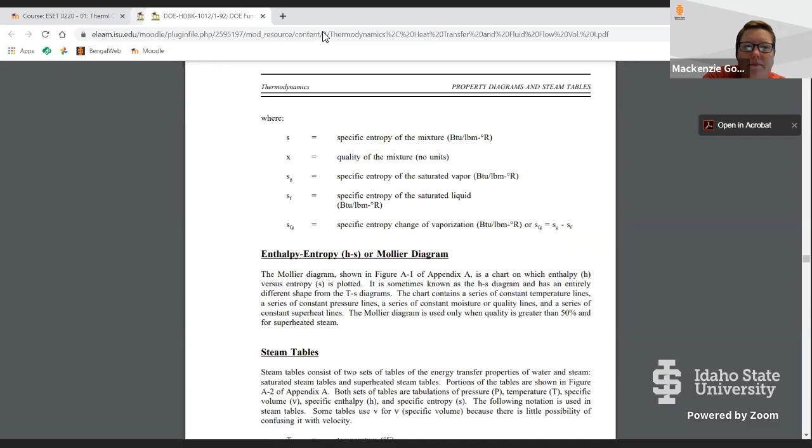So if you go to week 4 under Thursday, there's a couple of different steam tables. Let me share. You guys can see, so we've got English and SI units here, and then we've got some for saturated steam. Let's open them up. So English units, SI units, saturated steam.

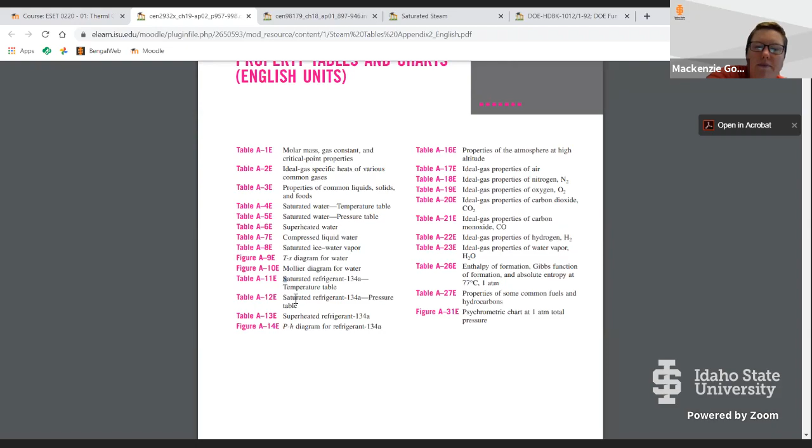So if you go in here, this English unit, it has this list of tables in the appendix, right? And so depending on if you're dealing with saturated liquid or superheated steam, these tables A11 and 12 are going to be steam tables. And if you go through here, right, so here's for our saturated refrigerant, at a specific temperature and pressure. And then it's going to tell us the specific volume, internal energy, enthalpy, right? So this is essentially an example of a steam table.

They can be laid out slightly different ways if you're looking at your textbook, right? It has a pressure, right? So on page 241, it says atmospheric pressure. And then it has saturation temperature, 100 or 212 or 250. And then it has a list of different quality percents for the steam. And then from there, you can determine the specific volume, density, enthalpy, entropy, etc., for the pressure and temperature and quality of water that you're looking at.

So they're each kind of laid out just a little bit different based on the information you're actually trying to find.

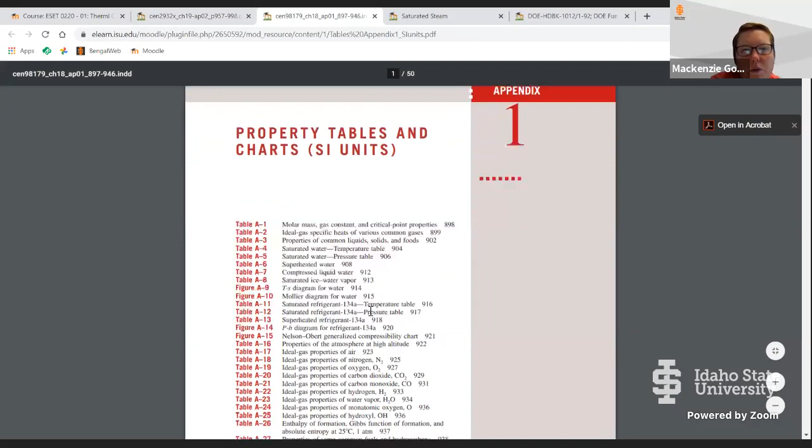So here we have for our other units, our SI units, and the saturated tables, table A, 11, 12, and 13.

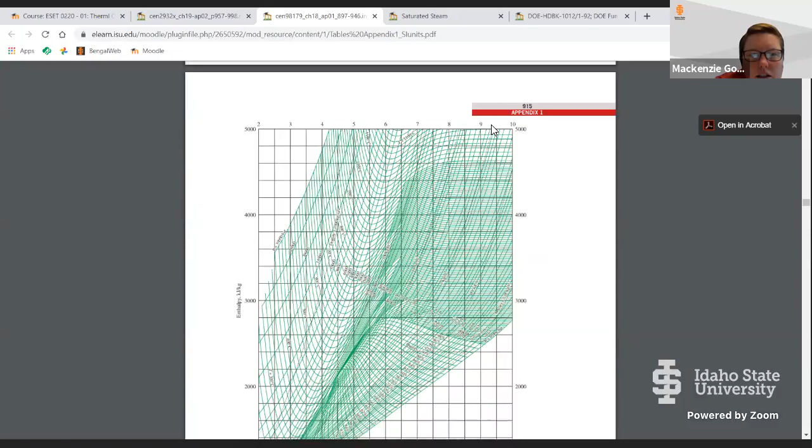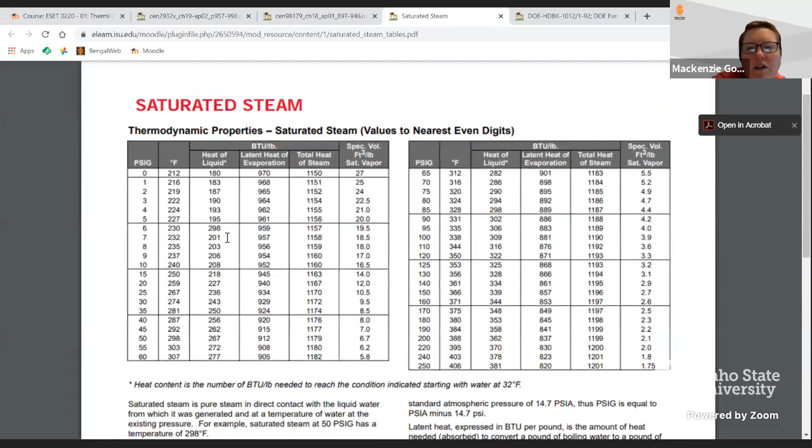But we can scroll down here. And for a given temperature and pressure, here's our specific volume, internal energy, enthalpy, entropy. And then here, this is a little bit simpler table. This is telling us it's for saturated steam, and we have that saturated steam at a specific pressure and temperature. Because we know we're dealing with saturated steam, that pressure and temperature are going to be given as they relate. That's how we get our saturated steam. And then we can get our heat of the liquid, latent heat of evaporation, total heat of the steam, specific volume. So this table is just giving us a slightly different layout.

But what's really important about steam tables is they allow us to make an important distinction between the properties of steam in different thermophysical states. So as we look at our subcooled or wet steam, or our dry steam, or superheated steam, whatever it is that we're looking at, you can look at the different table and determine all of these different parameters.

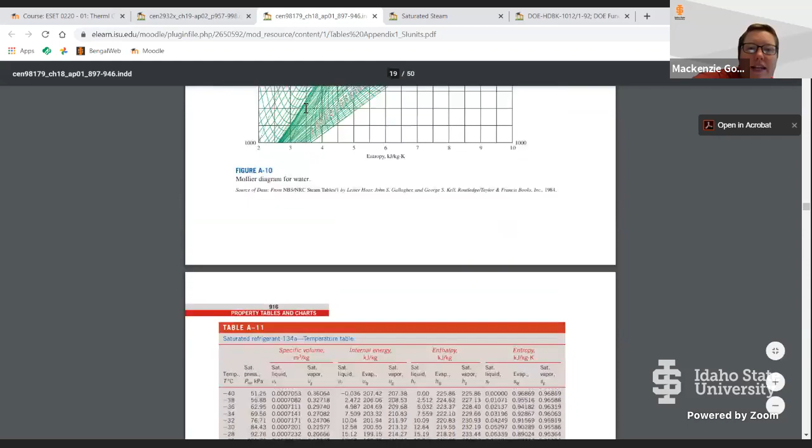You can also look at a graphical representation of this. For example, in the textbook on page 245, there's a PH diagram for water and a TS diagram for steam. And in these PDFs that I have on Moodle, you can go right here. Figure A9 is a TS diagram for water.

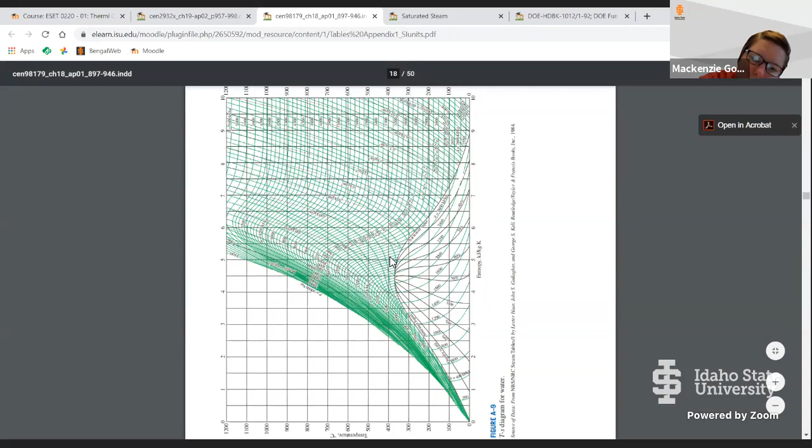So we can look at the same thing online. Here's a TS diagram for water, which looks just like figure 7.19 from the textbook. You can trace your temperature and your different pressure lines, and you can find where that interacts with different specific entropy, and you can do it graphically. So I've got temperature here, entropy here, and different pressures on these lines. I can trace that, but we put it in table format where it's much easier, in my opinion.

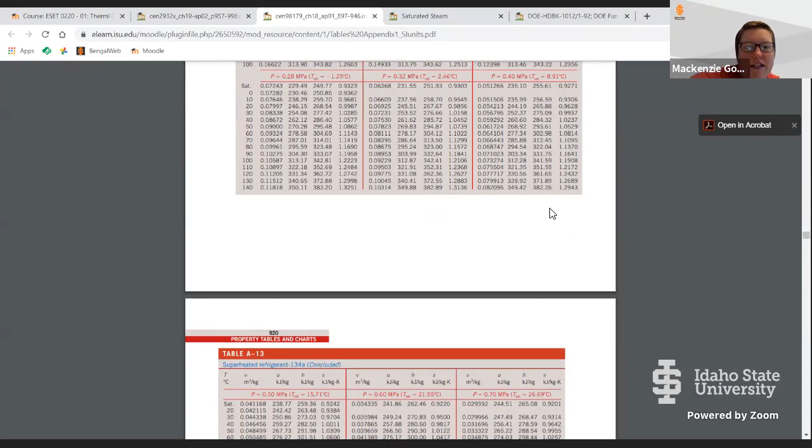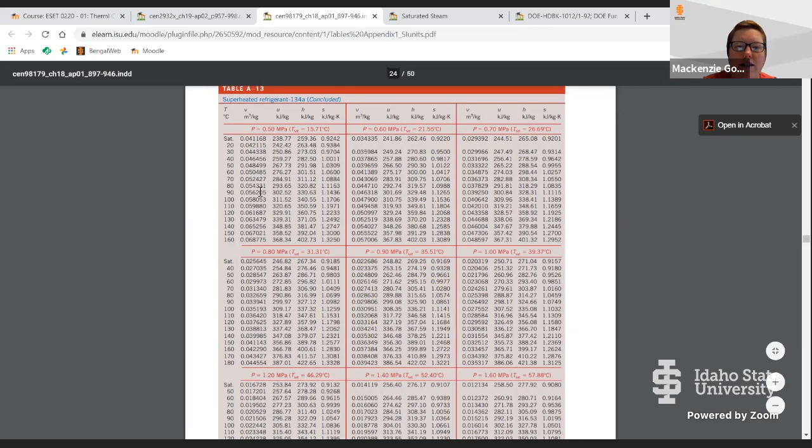Table 7.3 in the textbook, and then the tables A11, 12, and 13 on these online PDFs, give us that information in a much easier to digest format. I would much rather look at this chart for a specific pressure and temperature, look at my temperature, volume, enthalpy, entropy, internal energy, etc., than trying to trace it on a figure that looks like this. This is a much more complicated and error-prone scenario.

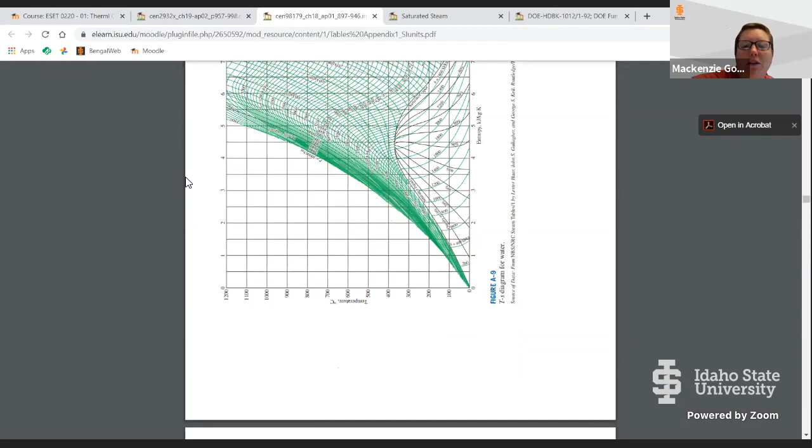So I want you to have seen the steam diagrams. I want you to understand that by charting this information experimentally, we were able to put the tables together, but I'm only going to ask you to read information from the tables. I'm not going to ask you to look at Mollier diagrams or TS diagrams for water and pull out entropy and stuff. So just so you know the expectation in class.

But we are going to do a quick exercise, working through an example in the textbook for using the steam tables. They're a very valuable resource. The example problem talks about their use for nuclear engineers, but they're also extremely important for operators who are going to be interacting with systems that have steam, water, or a steam-water mixture.

Their example is a PWR at a pressure of 2,250 PSI or 15.5 megapascals. This example is on page 244 of the textbook. Liquid water enters the core at 295 degrees Celsius and leaves at 335. What's the difference in the specific enthalpy of the water entering and leaving the core? So essentially what it's asking us to look up is specific enthalpy, H, for water at 15.5 megapascals and 295 degrees Celsius.

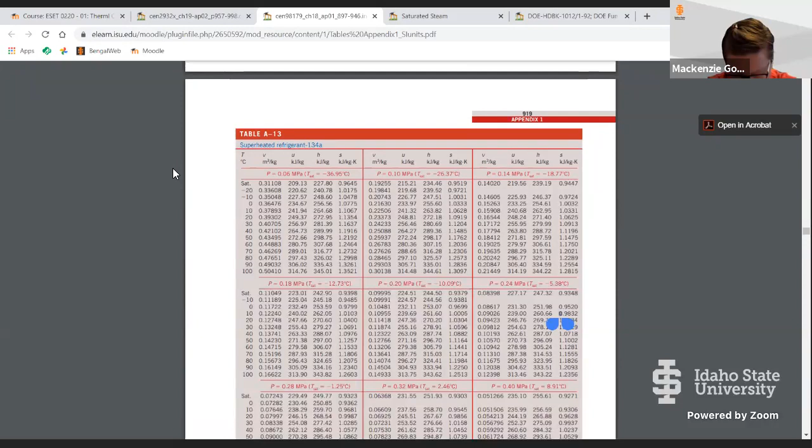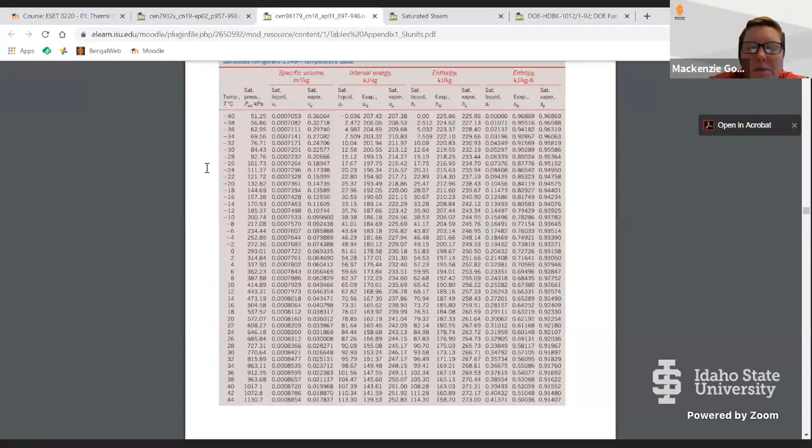So we need our table for steam. Water enters... and I'm not sure if these online ones will have the exact pressure and temperature we need to look at. It doesn't look like they go high enough. So those of you with the textbook, 15.5 megapascals.

On which page of the table? 243, that's correct, middle. And our temperature that we're dealing with is 295, right? Yeah. Makes sense. Over here is your 295 Celsius water, but that's at a different pressure. So we want to find our specific enthalpy of the water entering the core, right? Yes.

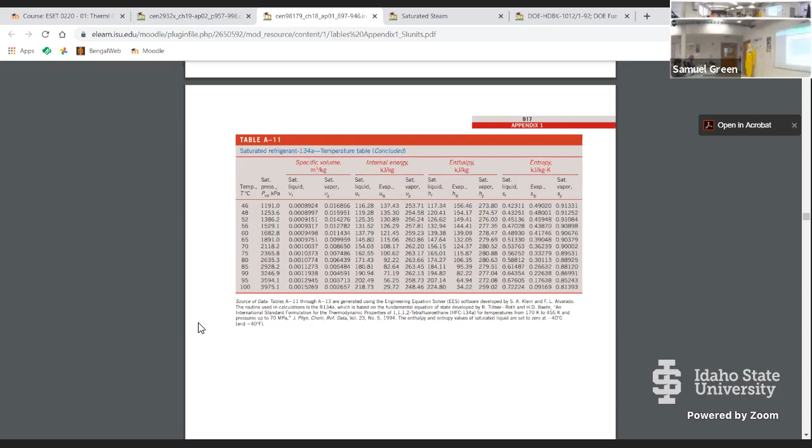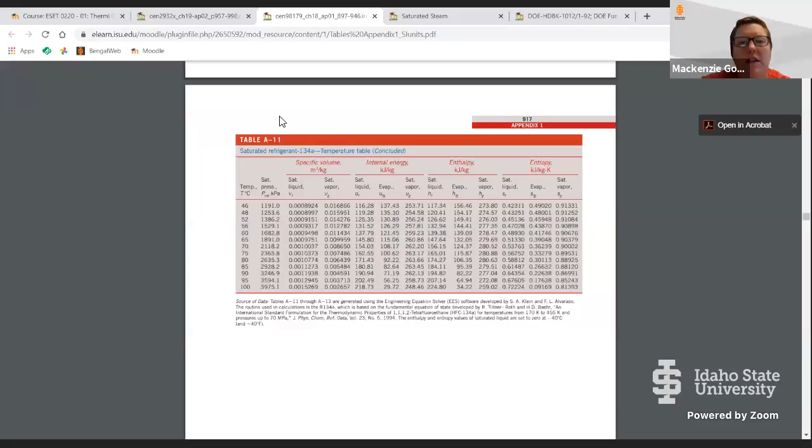So how do the percentages come into play, or like the quality? So from the DOE handbook, there is an equation for quality. I think there's one in the textbook as well. Essentially what it's saying is what percent of the mixture is water and what percent of the mixture is vapor. So quality, if you look on page 235 of the textbook, it gives you essentially that quality is the ratio of vapor to the total mixture. Half the mass of the mixture is liquid and half of it is vapor, then our quality is 0.5, or it would be 50%.

So at essentially 5%, you're almost all liquid, and at 90%, you're almost all vapor.

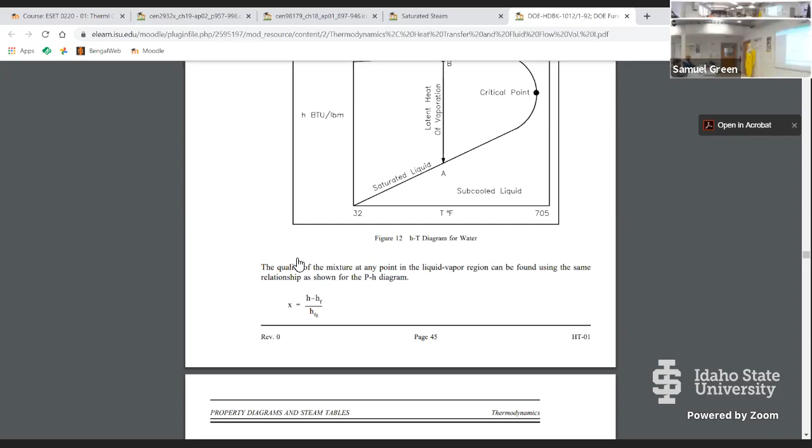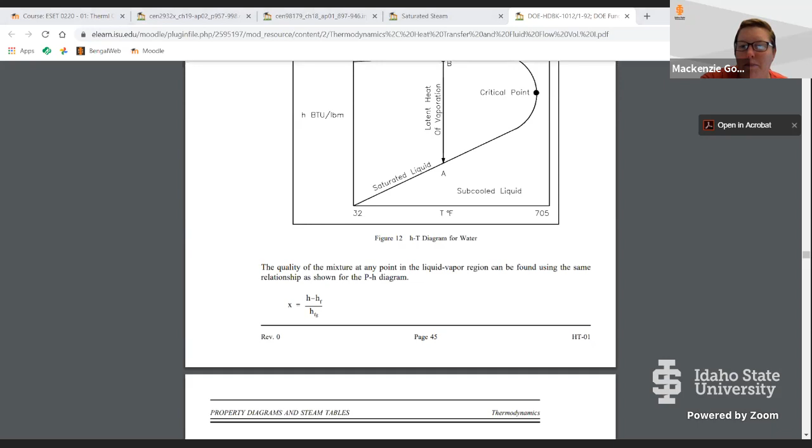Does that make sense? Small part of it makes sense. The part about the water quality makes sense. The question, yeah.

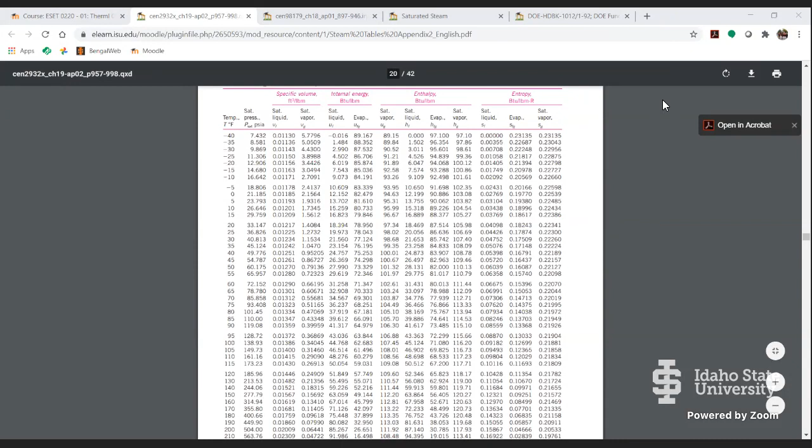I couldn't tell who said they have a question, but go ahead. This is James speaking. Are we looking for our saturation temperature? Because that's 8 MPa versus our 15.5 MPa, which has a different saturation temperature.

Right, so essentially, because we know the water is water when it enters the core, right? And then it's going to be increasing in temperature at that specific pressure, right? So we're going to look here at the saturation temperature of 100...

I see what you're asking. It gives us this 15.5 megapascals, and we look at that on page 243. It says the saturation temperature is 344. So how do we find out what our enthalpy is for the water coming into the core? Because that's at 295, right? Is that what you're asking? Yeah, that's correct.

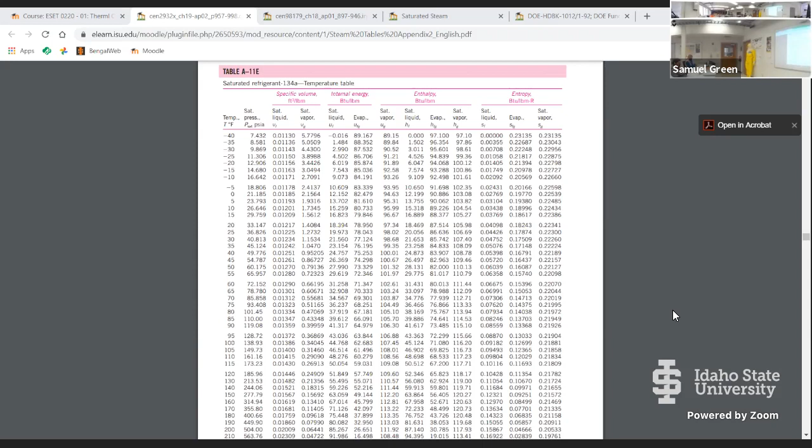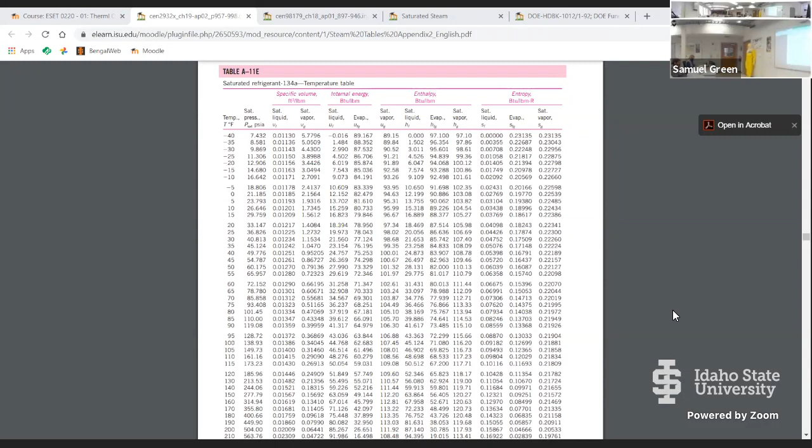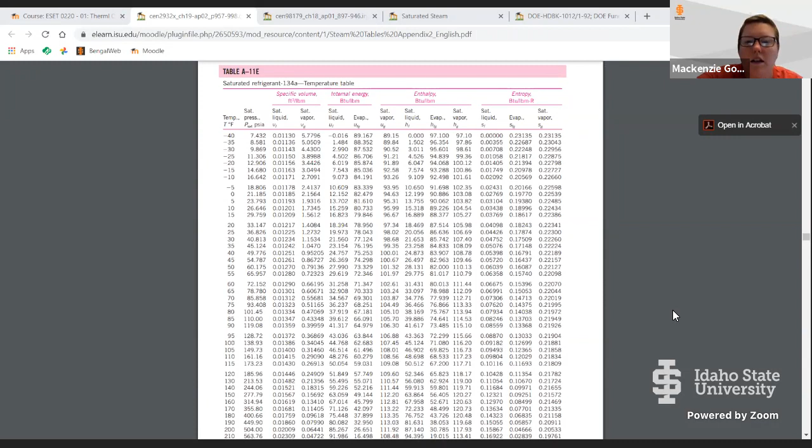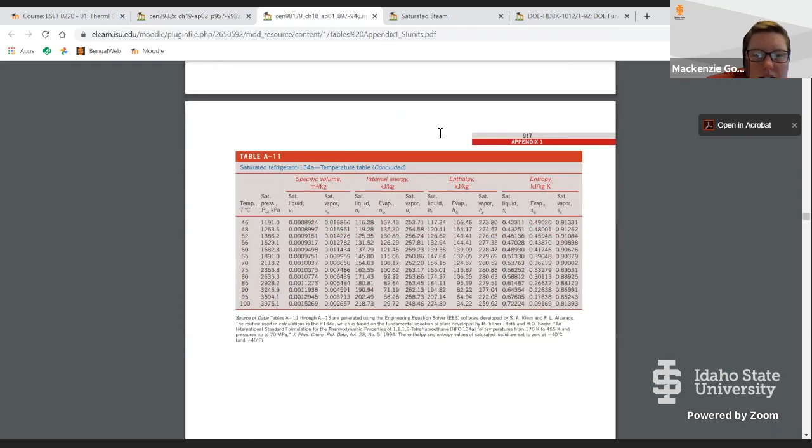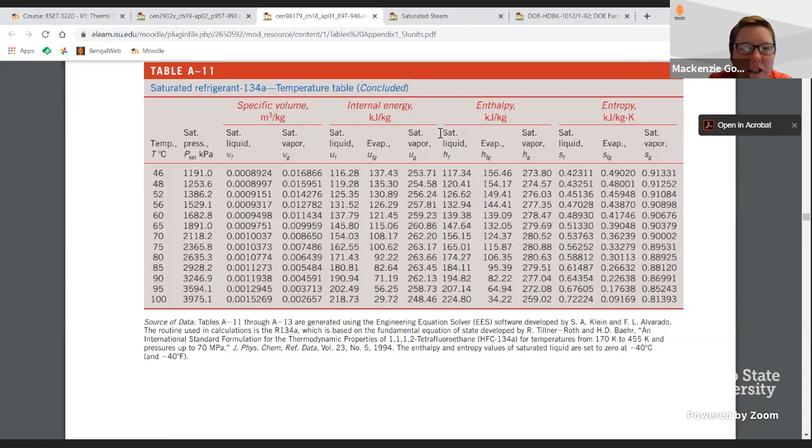And 12, 14. So let's look. It looks like I'm trying to bring this up to show you guys on the computer, because I know if I hold the book up, it won't show very well.

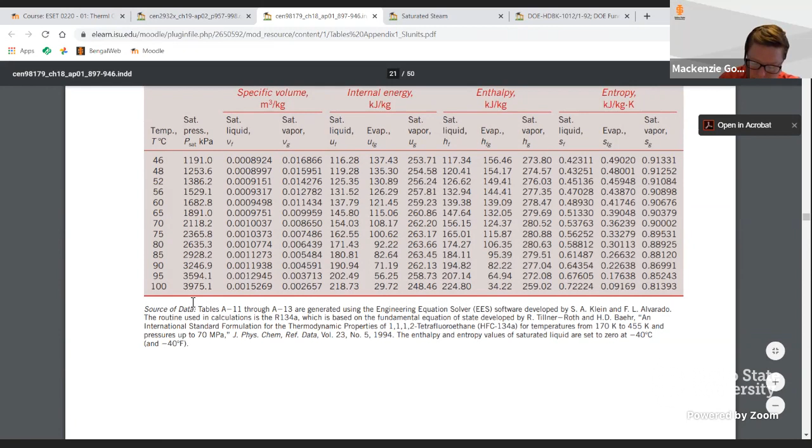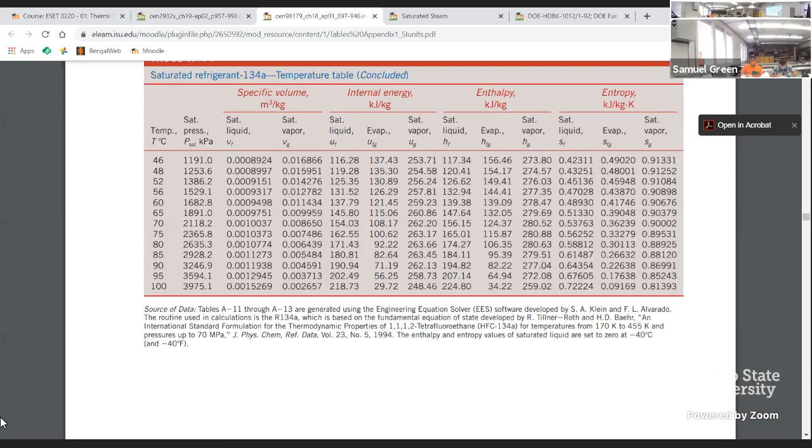So would it be fair to say that we should have been looking in the appendixes the whole time to solve that quiz problem? Yes. That quiz question, I believe that when I wrote it, I said specifically using the steam tables from the text. Yes, you did.

And so then when you read example problem 7.5, it tells you, hey, we're looking at steam tables - steam tables are one of the most important resources. And we have this pressure and temperature liquid water, and then this pressure and temperature liquid water. Find the difference in specific enthalpy. You should say, okay, I have liquid water at a temperature above which it normally boils, being held at a pressure. So then I know I need to be looking at liquid water.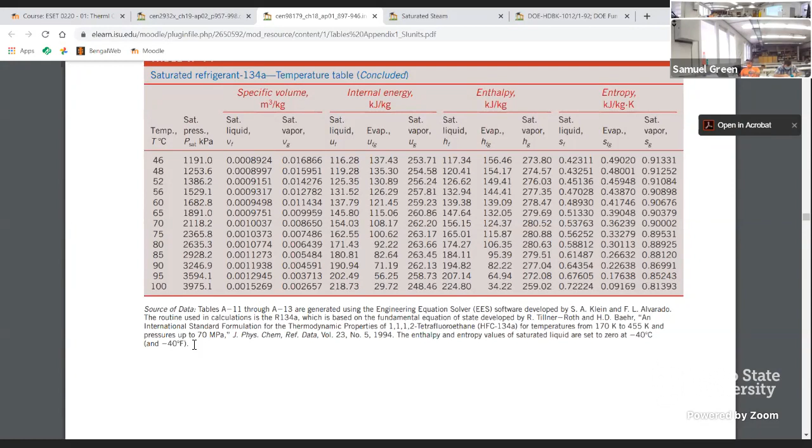So the quiz questions should be from information that's actually available in our small selections in the textbook. Does that make sense? So you're saying that the quiz question should not have required us to go to the appendix? Oh, no, it should. I'm saying that the appendix does not hold a complete and whole steam table, it is a portion of a steam table.

So it's possible that at some point you might have a system where, if you go back to this textbook, that pressure and temperature aren't in the book. I'm not going to ask you a quiz or test question that doesn't use resources you'll have available to you. So what I'm saying is you don't have to find a different steam table. If you have the textbook, the sections that are reprinted here for you to use are what I'm going to use for questions.

Does that make sense? Can we use the book on the test next week? If you need a steam table, I'll make sure it's printed out with the test. So no, you can't use the book. A one-sided crib sheet, right? Yes, you can have a one-sided sheet.

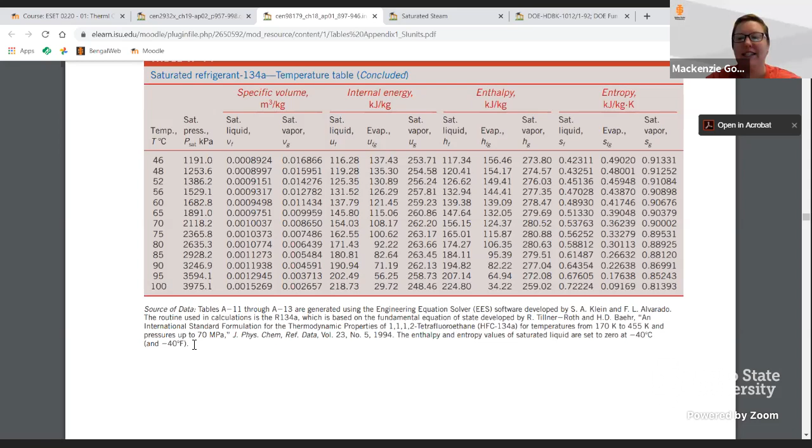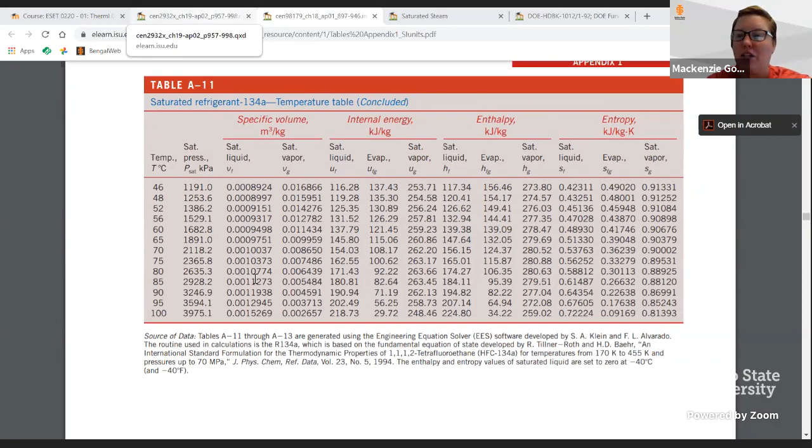Before we move into talking about the test, which is the next topic, does anyone have a question on that example, or how to get to the steam tables in the book and what kind of information you're looking for in a question that tells you which steam table to use? Yeah, I got a quick one. What cued you to assume that the water was subcooled?

So when we look at the temperatures in that example 7.5, it's in Celsius, right? What temperature does water normally boil at in Celsius? 100, right. And what temperature is our water, liquid water, coming into the core at? What did he say it boils at? It's coming in at 295, right? So significantly higher temperature than it would normally already be steam.

Subcooled water is water that is still liquid water at a temperature that it should be steam, right? So because we see that it's liquid water, we know that it's being kept a liquid by that pressure. So we know from the definition of saturated steam and saturation and subcooled liquid and saturated water, that this is still going to be a subcooled water because of the temperature that it's still a liquid at.

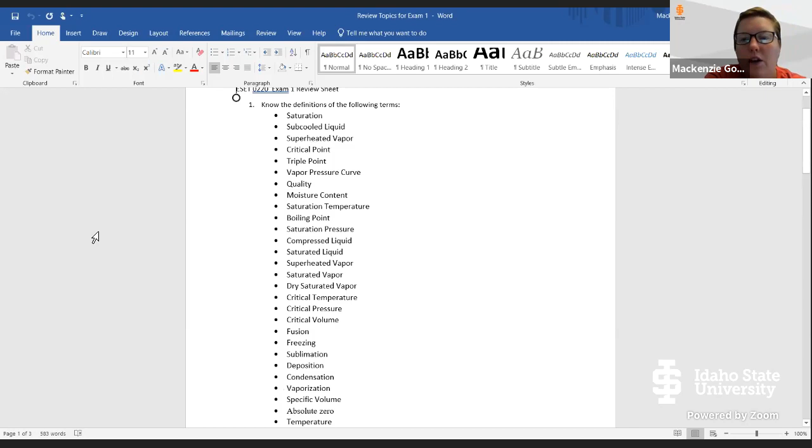Okay, so first we have a list of definitions, right? It's a pretty long list, but a lot of them are pretty easy definitions. So I would definitely be familiar with what these different definitions are, okay? And they are all in the DOE handbook, or both the DOE handbook and the textbook reading.

The textbook does have a handy little index at the back. So if you're looking for the definition of, like, critical point, you can open up the index and it tells you that point is on page 983. And then you can flip there and it talks about critical point and your liquid vapor mixture. And there's also critical point shown in the presentations and it's in the DOE handbook.

So all of these we've gone over. You've either read them or we discussed them specifically in class. Okay, we talked about the Carnot cycle, right? So a question might be: if I give you the temperature of the heat sink and the heat source and the amount of work that's done, can you determine the amount of heat that went into the system, right?

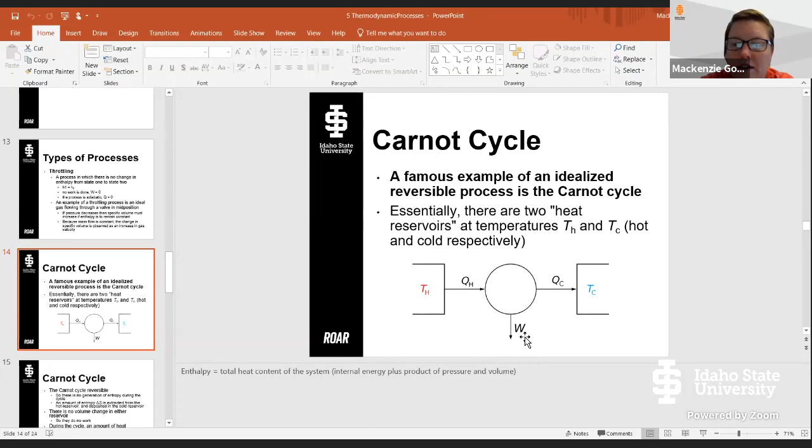So from this PowerPoint, right, let's look at the Carnot cycle. So if I give you the temperature of the hot leg, the source, and the temperature of the heat sink, the cold leg, we have this relationship between the heat energy going out and the heat energy going in, right? And we can tell, work right here on your review sheet, is the equation that relates all of those, right?

So we've got our work over our heat in, which equals the efficiency, which is one minus the ratio of the temperatures. And if I gave you a hot and a cold temperature, and I said how much usable work, this W, was done by the engine, and that the designer of this Carnot engine had such and such efficiency, would you be able to tell me how much thermal energy the working fluid has to bring in? So solve for this. And if I asked you if this system could really exist, would you be able to describe why or why not?

So for the Carnot cycle, can this type of engine or cycle ever really exist? You said no. That's correct. Why? I don't know that.

Well, it doesn't preserve all energy, which doesn't happen due to friction and other vibration losses and transfer through the boundary.

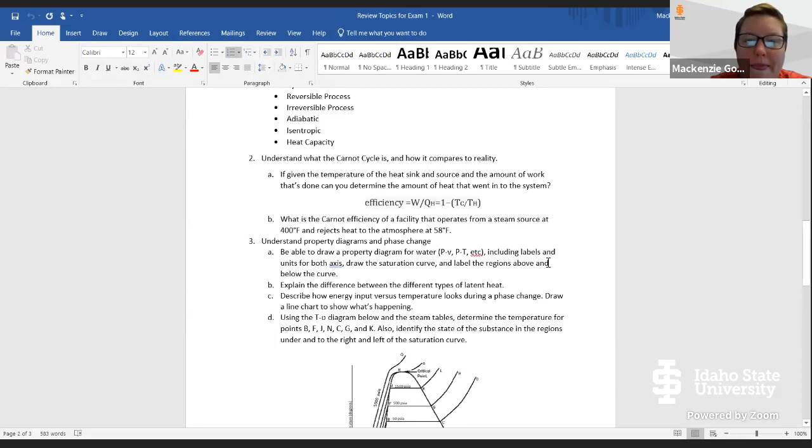Then we're gonna have some questions about property diagrams and phase change. So if I asked you to draw an example PT diagram for water and tell me what units should be on the axis and what the saturation curve would look like, what I'm looking for is something

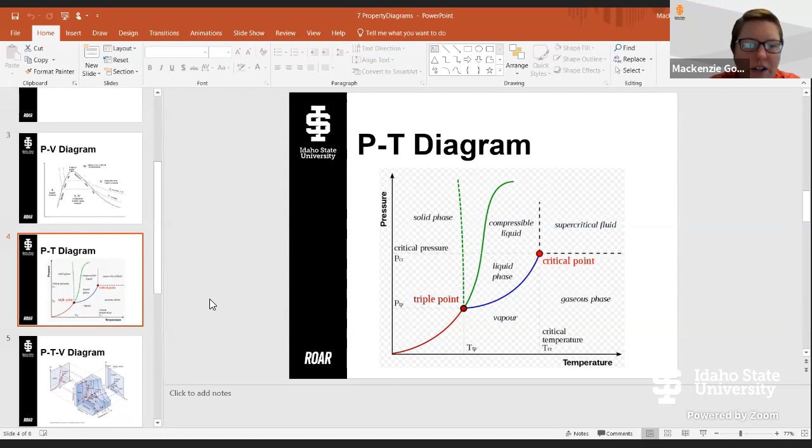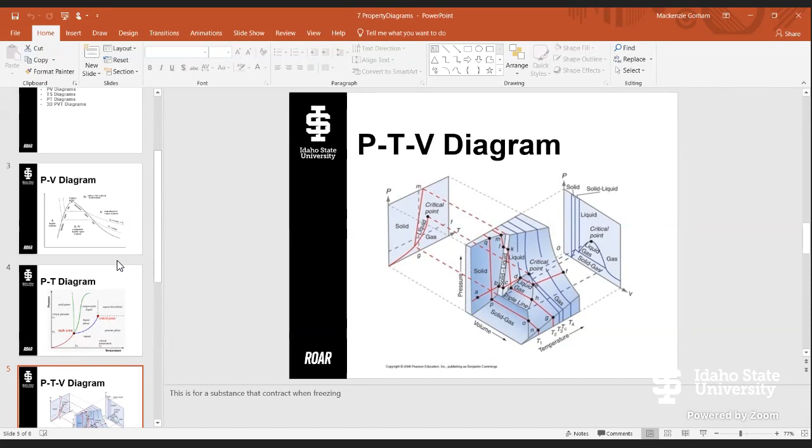that we went over in class. Right, so here's a PV diagram, and here's a PT diagram. You should be able to put temperature and pressure, show a triple point and a critical point, and tell me what phases are happening in each section. I'm not going to ask you to do the 3D ones, that's too much drawing, but I might have you draw a 2D one and tell me where you'll find saturated liquid or where you'll find a solid, and what the phase changes are between those.

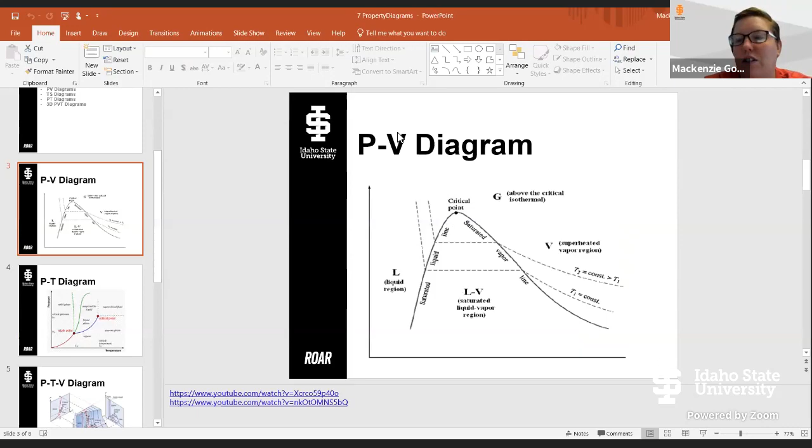So if you have a diagram up and I tell you to show me where fusion is happening, and where freezing and melting and all of those are, you should be able to show that information.

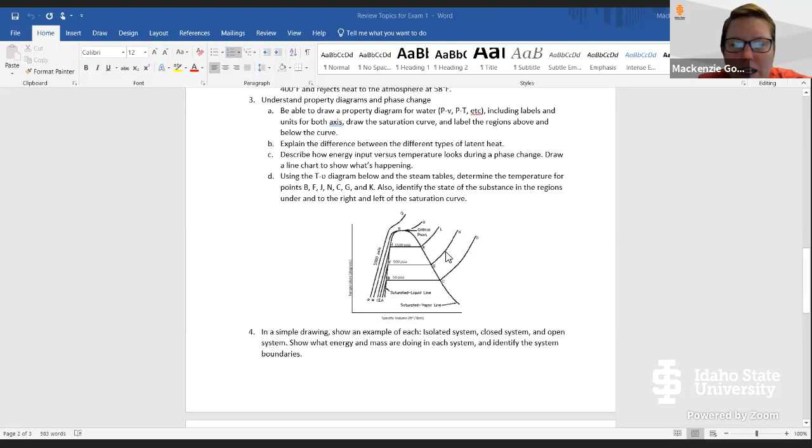Then here we're just a couple. So if I ask you to draw it, could you draw it and label it? If I give you a drawing that isn't labeled, could you fill in the labels here, and show me which substance is in each region?

Different thermodynamic systems: isolated, closed, open. Could you describe what the energy and mass are doing in each system? Take a closed system - is there transfer of energy? Yeah. Or is there transfer of mass? No.

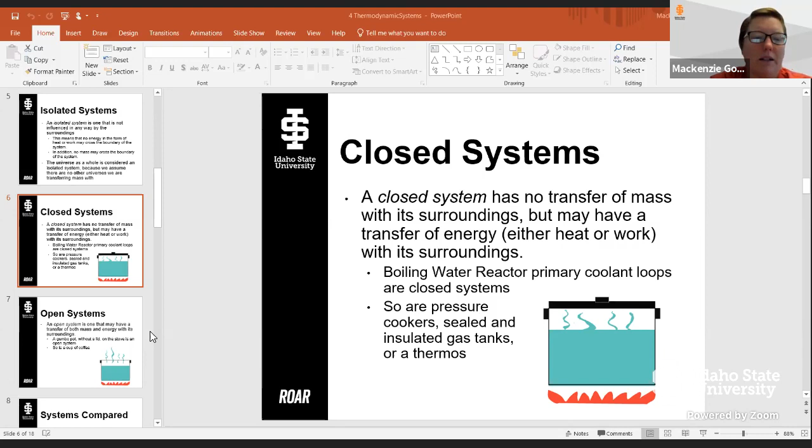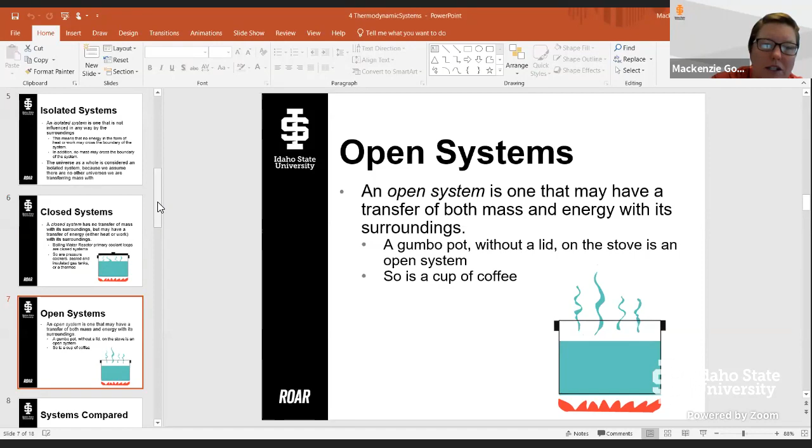So let's pull this up. Yes, right here, this set of slides. Closed system: no transfer of mass, but there may be transfer of energy. And we had an example of a pressure cooker, sealed and insulated gas tank, a thermos, or a BWR system. And then we talked about isolated systems and open systems, so being able to essentially draw this and show me whether or not heat and matter are transferring or not.

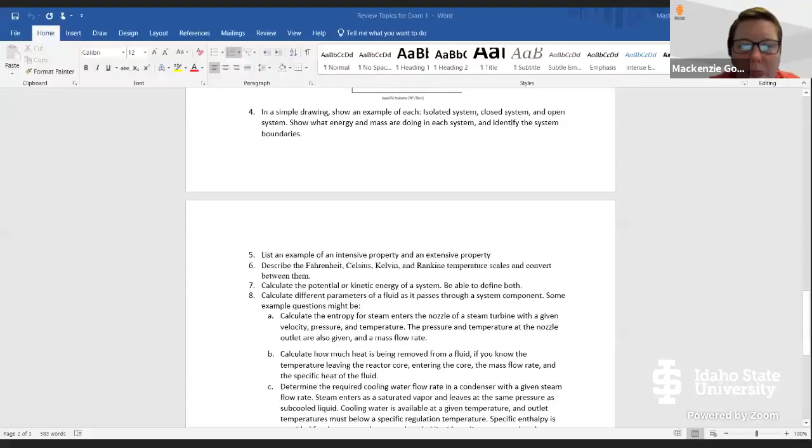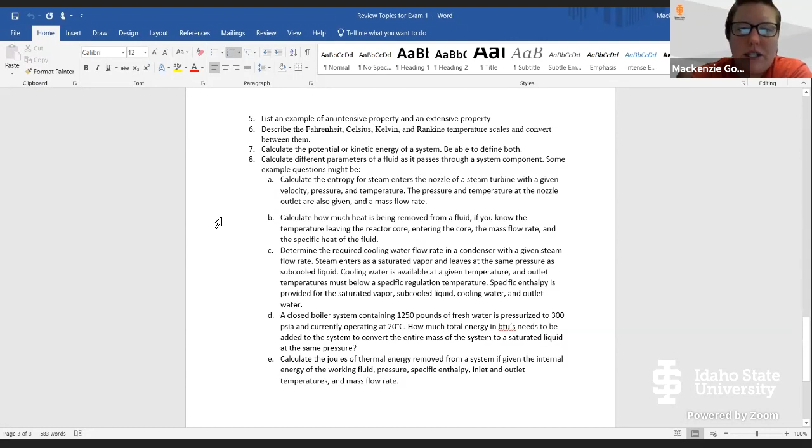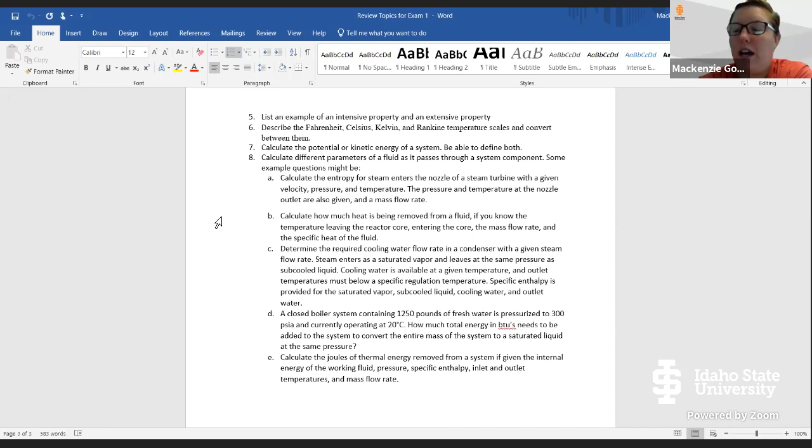Okay. Then we talked about properties of state, and intensive and extensive properties - ones that depend on the mass of the object or not - and being able to give examples of those and explain why they're intensive or extensive. Understanding temperature scales and conversions between them, and what it means to have absolute zero, and why we want a temperature scale that might start at absolute zero as a zero instead of as a negative, and just being able to conceptualize that.

Using the equations in the DOE handbook for potential or kinetic energy, being able to define those and make calculations. It will not be open book, but you can have a formula sheet.

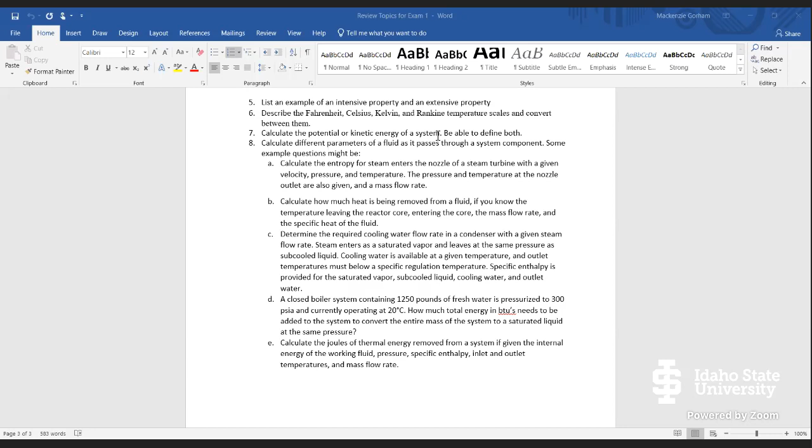So is that just formulas, or can we write notes on it as well? You can write notes on it. It can have whatever you want on one sheet of paper. One side, or the whole sheet of paper, both sides? One side.

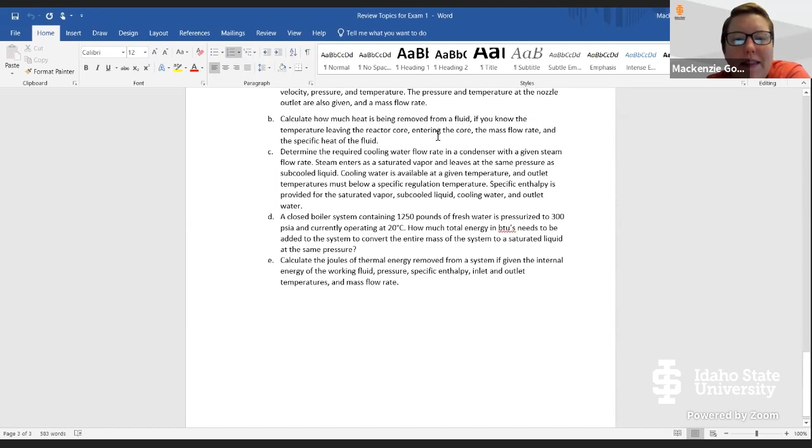Okay, and then we have some calculation questions. So being able to determine different parameters of a fluid as it passes through some system component. I gave a selection of example questions - we did a couple of these in class, and there's a couple that are from examples in the textbook.

But for example, if I want you to calculate entropy, and I say that steam is going to enter the nozzle of a steam turbine, and you have a velocity, pressure, and temperature - and that velocity can either be mass flow rate, or I can tell you how big the nozzle is so you know how much mass you have - and then you have the pressure and temperature at the outlet, could you calculate entropy based on that?

This is example B, which we did in class, and everyone had trouble with the unit conversion at the end. We've got how much heat is being removed from a fluid, if you know the temperature it enters and leaves the core, the flow rate through the core, and the specific heat of the fluid. So if we had water at a given pressure and temperature, you should be able to look up the specific heat if I give you a graph, or I might just tell you the specific heat of a few fluids on the test.

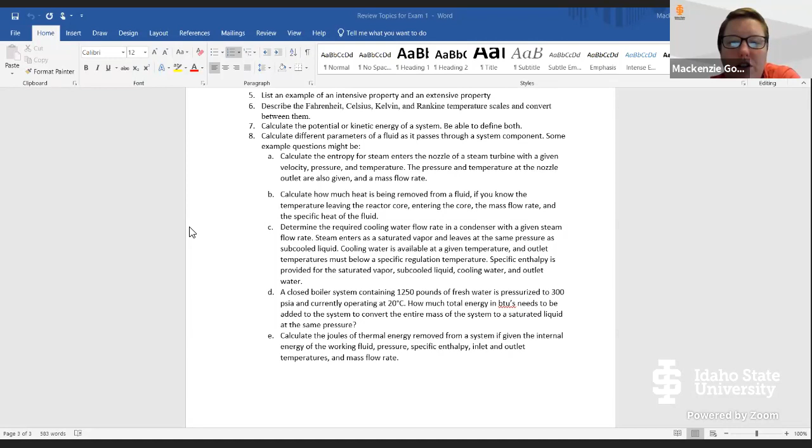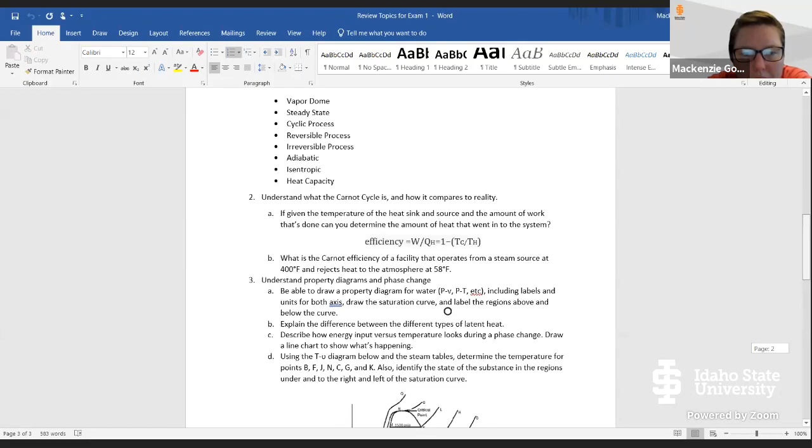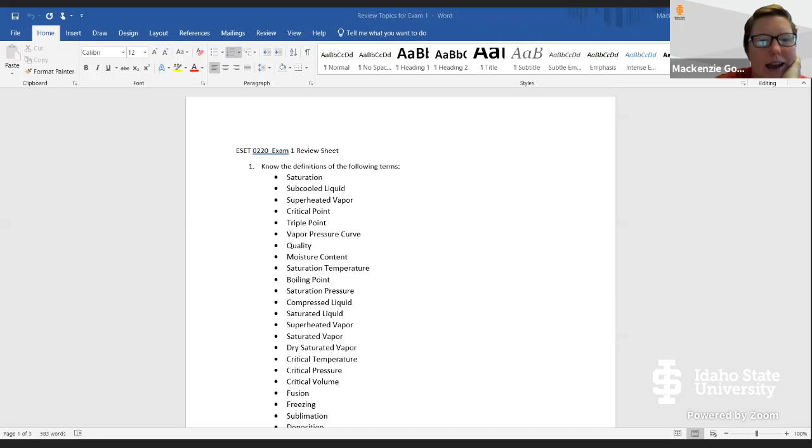That gives you an idea of the topics I'm going to put on the test. I think I might have skipped one important one, which is being able to understand why the phase change happens, per the graph we looked at, where energy gets added and then there are plateaus. Let me show this real quick.

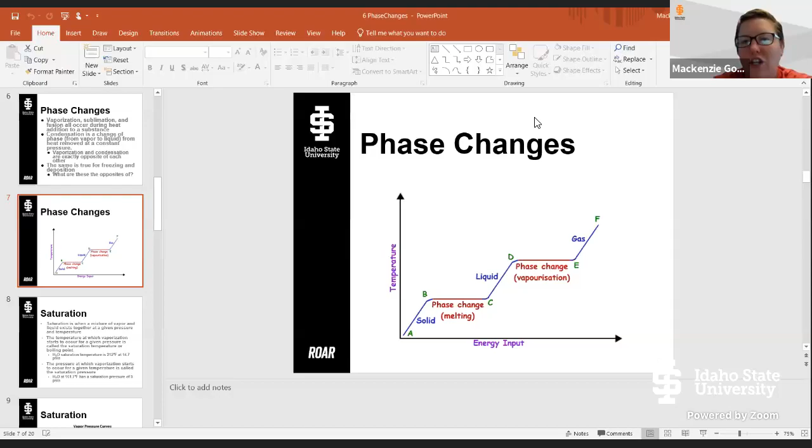Okay, I know we're almost at the end of our time period, but does anyone have a question they want to ask real quick?

Something I'd like to bring up is we were supposed to discuss that enthalpy of ice problem during this session. That's what I remembered, but maybe we'll have to put it off a little. Yes, we'll have to get back to that. I'm not going to put anything like that on the test. We do still need to go over it, but there won't be a question like that on the test, and we'll make sure everyone's on the same page, and I'll still give you time to revise, but we won't introduce it today since we're already at the end of our time.

I have another question that's unrelated, if you don't mind. Sure. You sent me an email that said that quiz question was a typo. Yes. Okay, are you going to give me the point for it? I think you still had an incorrect answer, right? Well, I did, but if there hadn't been a typo, I would have seen that all three of those were incorrect, and I would have marked all of the above. Because the difference between... here, let me get back to the question, please.